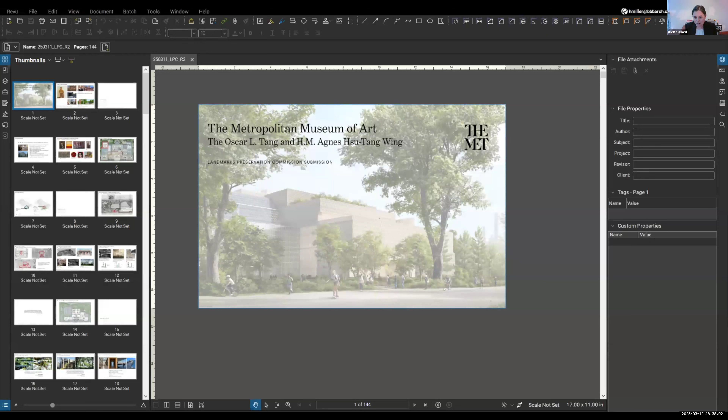Hi, everyone, can you hear me? Yes. Okay. Hi, my name is Brett Gallard. I'm the head of capital projects at the Metropolitan Museum of Art. Let's see if we can get our screen shared. Sorry, one minute, we just want to make sure we get the screen up. But maybe, in the interest of time, while they're working on that, because I don't need a picture to start talking, I'll just start and then we'll get the image up on the screen.

It's nice to be with you all again. I think the last time we saw you was for our Northside Chiller Plant project and 83rd Street doors. We're really excited to be here tonight with our colleagues from the Parks Department and the Central Park Conservancy, as well as members of our design team. This is an incredibly exciting project for us and one that's been a long time in the making.

It's the Tang Wing, our new wing for 20th and 21st century art, that'll be located at the southwest corner of our campus and will replace our existing wing at that location. In advance of our public hearing at Landmarks, which we are targeting for April 22nd, we'll be presenting to the 5 community boards surrounding the park. We were with CB10 last night, we're with you tonight, then CB7 tomorrow, then next week CB8, and the week after that CB5.

Our hope is to get 2 resolutions, one for the building and one for the landscape. We have 2 applications before Landmarks, one for the Tang Wing building and one for the landscape restoration and improvements around the building. That's why we're here tonight with our colleagues from Central Park Conservancy and the Parks Department. The landscape scope will also go through the Public Design Commission.

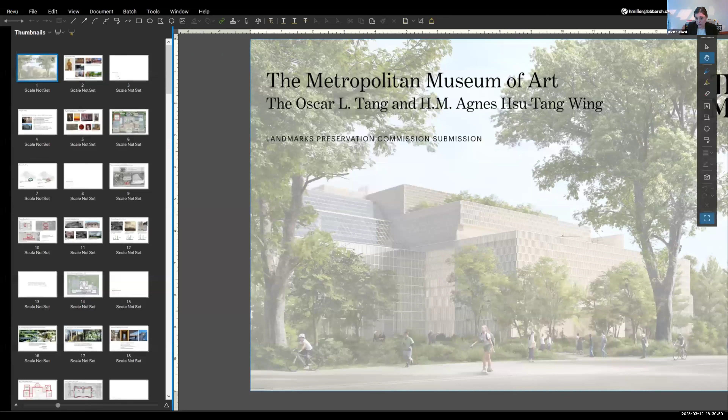In addition, we've embarked on a full EIS process for this project, so we will have a public scoping meeting for that on April 8th. The draft scope of work for the EIS is available on the Parks Department website, and I believe we shared a copy with you as well, but if we didn't, we'll make sure that we do.

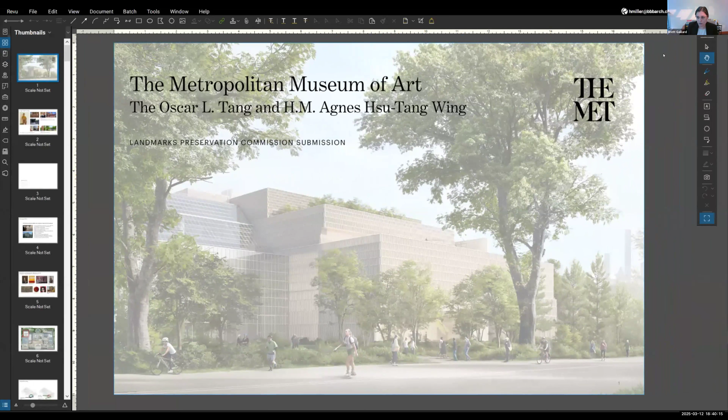Our overall schedule for the project, assuming all goes well, is that we aim to start construction in the summer of 2026, about a year and a half from now, with construction lasting approximately 3 years. Once the building construction is complete, the landscape work will begin with a target reopening date in 2030. It takes at least a year to reinstall the art, so while we're doing that, our colleagues in the park will be doing their work.

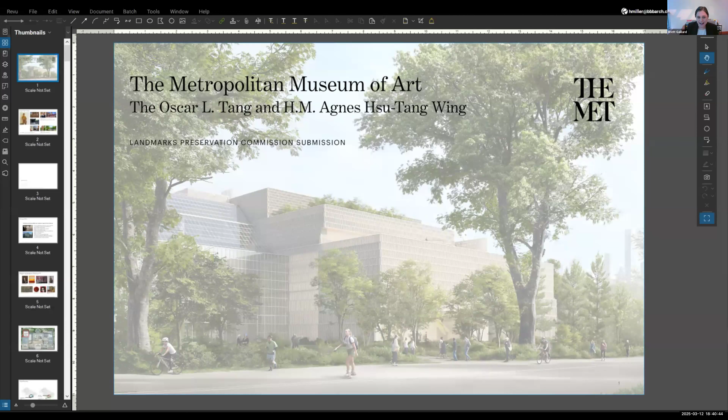Thank you so much. So we have engaged with an incredibly talented design team for this project, 3 of whom are with us tonight. As with our collection of art, we're charged with caring for and adding to the Met's collection of buildings with design partners that are aligned with our mission. For the Met, the selection of Frida Escobedo Studio as the design architect for the project is really just a continuation of a legacy of selecting innovative and contemporary architects of their time to add to the Met's collection of architecture.

So we're joined tonight by Andrea Shelley. She's the project director at Frida Escobedo Studio. In addition, we're also joined by Richard Southwick, partner at Beyer Blinder Belle Architects and Planners, who are the executive architects of the project, and they're known for their work on landmark buildings throughout New York and the world.

The Met, as you all know, is not only a landmark within itself, but it sits within the work of art that is Central Park, which is also a landmark. So we're joined tonight by the Central Park Conservancy, who are the landscape architects for the park area surrounding the wing. Nick Koster, Vice President for Design at Central Park Conservancy, will present the landscape. We can go to the next slide, please.

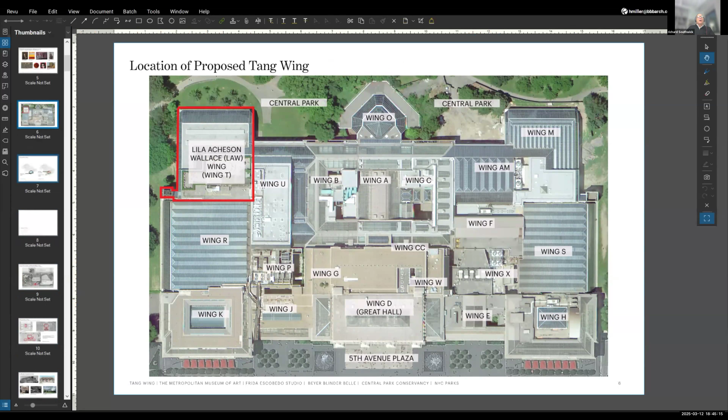The proposal will be built on top of the existing foundation where the parking garage is now. It will have precisely the same footprint of the building that it will replace.

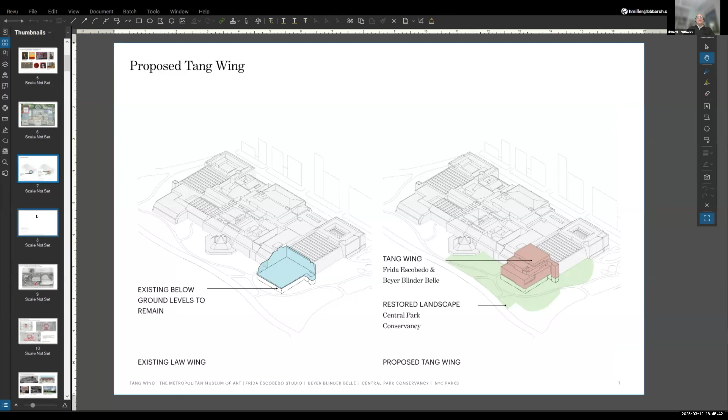We're going to have a two-part presentation. Andrea and I will talk about the Tang Wing and some of the context, and then Central Park Conservancy will talk about the restored landscape.

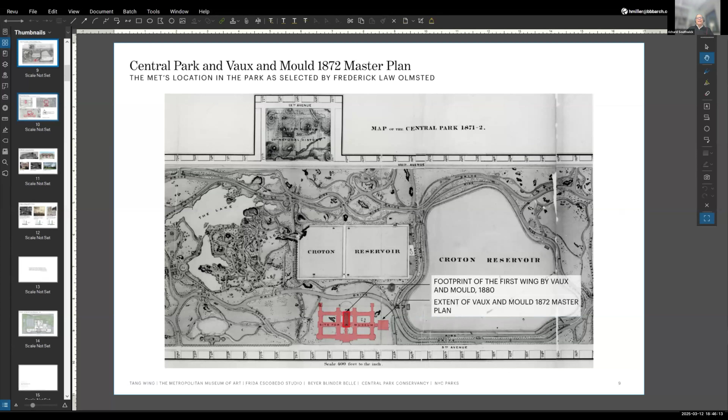The Met was located in the specific corner of Central Park selected by Frederick Law Olmsted. The first building plan was a master plan by Vaux and Mould from 1872. The first building was the current A Wing, which houses European art, and that was built in 1880. That's all that was built of this master plan.

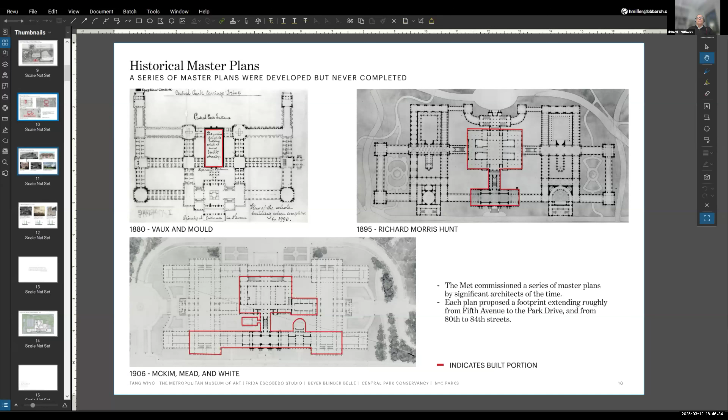Over the years, the Met hired some of the most prominent architects in New York to do revised master plans, all very similar - Richard Morris Hunt in 1895, McKim, Mead and White in 1906. Again, you can see in red what was built, which is just a small extent of the overall plan.

As the Met built buildings to build out the master plan, they hired the most prominent architects at the time, and that resulted in a whole diversity of architectural styles, as you can see, from Victorian to Greek Revival to International Style.

The Met is a living institution. It's always changing because the program needs are always changing. A McKim, Mead and White designed library and auditorium were both removed for the Watson Library we know now and the Grace Rainey Rogers Auditorium, both giving much more capacity for those needs.

Probably the most prominent change was the front steps that were designed by Richard Morris Hunt when approximately 1 million visitors walked up those steps. Kevin Roche, in his first project at the Met, did a much larger set of steps when the visitation was close to 5 million people at the time.

Landmarks recognized all this, and this quote from the 1967 designation report calls it one of the most notable monumental structures remaining in the city, designed by eminent architects reflecting diverse architectural styles. They recognized that as an asset of the Metropolitan Museum of Art.

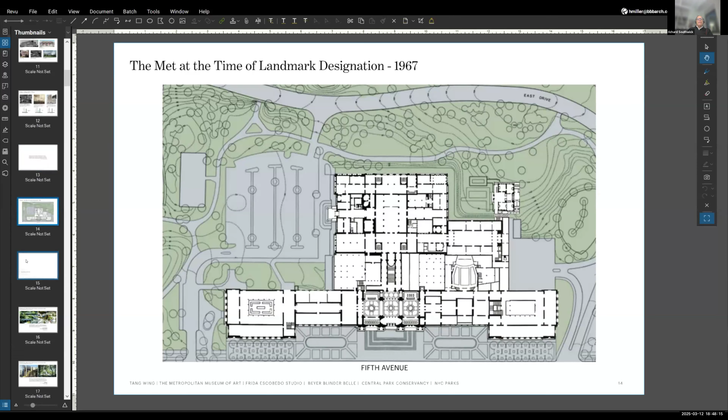This is the outline of the museum at the time of designation, flanked by two large parking lots to the south and north. The main entrance, as we know, is on Fifth Avenue, and then there's a secondary entrance in the park on the southwest corner.

Come the 1960s, the Met was celebrating its centennial, and to look towards the future, they wanted to do a new master plan, and they hired Kevin Roche to put that together. Kevin Roche is very well known for buildings that integrated the landscape and buildings, and this is a view of the Oakland Museum that was being completed at the time. Ada Louise Huxtable wrote in the New York Times that it's a potential breakthrough in museum design.

A little bit closer to home, the Ford Foundation was being completed at about the same time. Thomas Hoving, the director of the Met at the time, was very aware of these buildings and wanted to bring Kevin Roche on board. Roche worked very closely with Dan Kiley, the noted landscape architect.

There are a couple key concepts in Roche's plan. One, he wanted to complete his master plan, similar to the earlier ones, by having an alternating series of limestone and glass volumes. The visitor circulation was clarified by having clear paths through. He utilized daylight as a wayfinding tool to provide destinations within the museum, and wanted to enhance the relationship to Central Park, particularly in the glass volumes where you had good views out to the park.

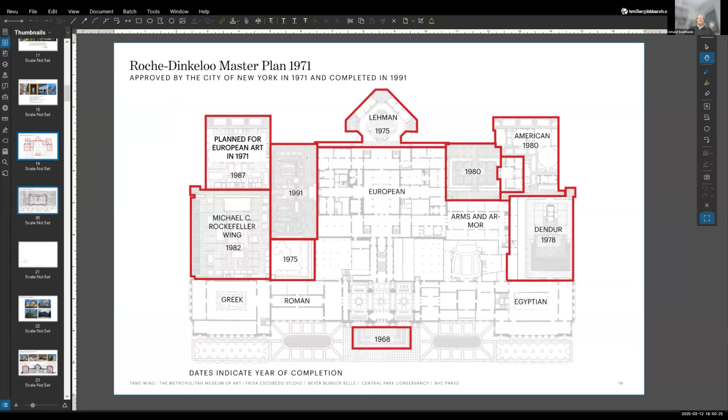We're going to talk a bit about the LAW wing and how that works currently for the Met's modern contemporary collection. This is what it looks like from the exterior: fairly tall, blank limestone walls.

It's interesting to compare the American wing and LAW. From the exterior, they're very similar, forming the northwest and southwest corners of the Met. But on the interior they're very, very different. The American wing, built in anticipation of the American bicentennial, was a series of period rooms, very well-designed and programmed spaces to meet that collection. LAW, on the other hand, was really originally programmed for European art. It's not really designed, and was not as good a fit for the modern contemporary collection.

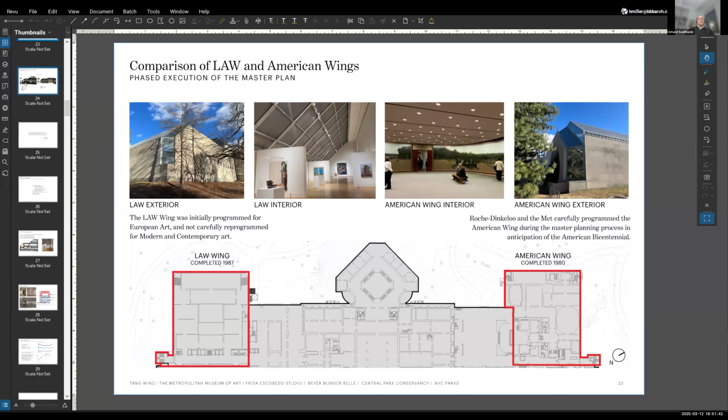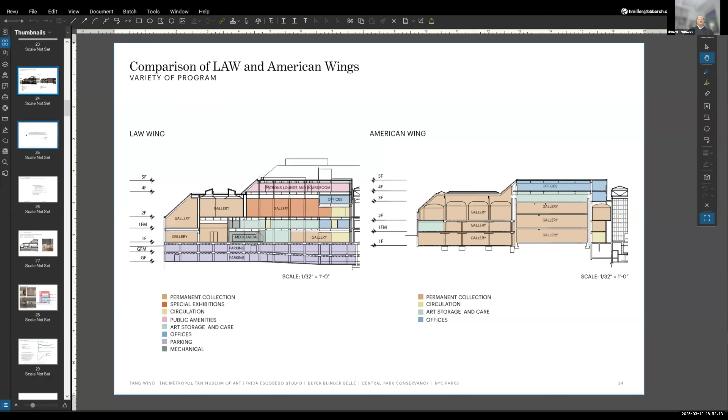Comparing the sections through the American wing and LAW, the tan or brown color is the permanent collection. The American wing had a very high percentage of space devoted to galleries. LAW, on the other hand, was a mashup of many different functions - a smaller amount of gallery space, a much lower percentage, with a lot of back-of-house, public amenities, and offices all put into the same volume.

Kevin Roche, after the fact, realized that this was probably the least successful of the parts of the Met that he designed. This is a quote from an oral history project: it never got built properly. I was never very happy with what happened. It wasn't a clear program - it kind of just got put together in pieces.

There are a number of defects that just don't work well - I'm going to focus on just a few. There's a series of skylights, visible in the right-hand photograph facing west, that would allow light to penetrate deep into the galleries, but that can't happen because it's detrimental to the artwork. So the shades of the skylights are always deployed. There's a lot of condensation damaging finishes, and the low wall at the base of the skylights limits what can be displayed in those very large spaces.

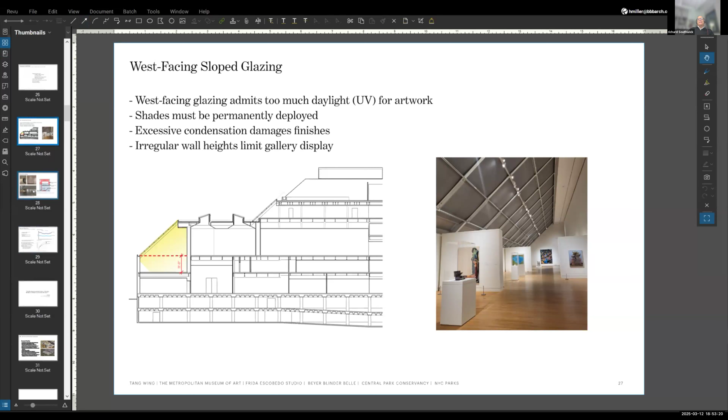Another main objective is to make the entire museum accessible, and that's one of the main goals in this project. A large mezzanine gallery has no accessibility, and a visitor who's mobility impaired needs to find a staff member - it's almost a two-block walk from the galleries back to the closest elevator and then back to the gallery again. So it's one of the things that just doesn't work; it needs to be remedied.

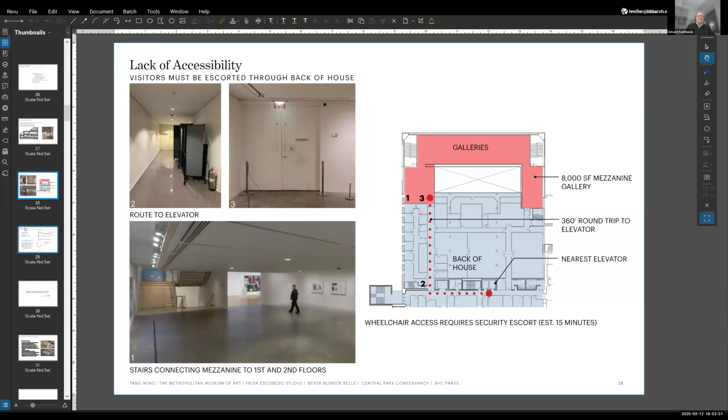As Brett talked about, both sustainability goals and the inadequate performance of LAW are factors. A new wing could improve energy consumption by 45% and over time have a lower carbon footprint than it does currently.

Finally, Roche really knew that museums change. This is a quote about how it needs to continue to grow, needs flexibility, and has to change going into the future. He recognized that these are living museums, and their change is inevitable.

So I want to set up Andrea, who's going to talk about the proposal, but these are some of the facts of that design and some of the goals as well.

The new Tang wing will occupy the same footprint as the existing wing, being no taller than the adjacent Kravis wing. It maintains the scale of the overall building forms throughout the museum, continues the use of limestone as a corner definition, and will enhance the visual connections to Central Park, which are now fairly non-existent. It will better accommodate the modern and contemporary collection, and achieve full accessibility and lower energy use.

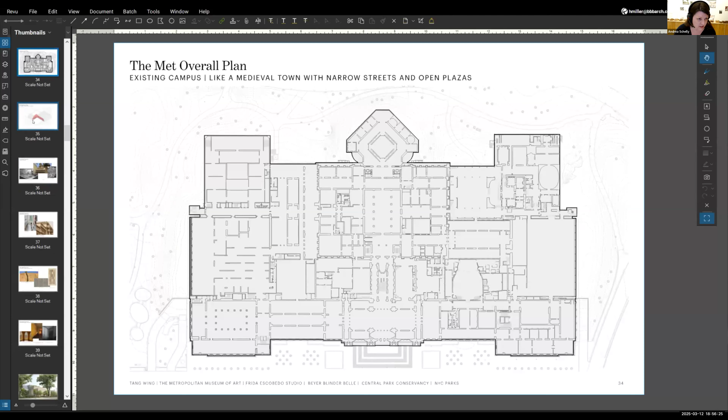The existing wing sits at a crucial crossroads curatorially between very important pieces of the Met's collection. The proposed wing will sit on the same footprint, the existing foundation walls of the existing LAW wing today. But through our interventions, we would like to open up new curatorial potentials within the new modern and contemporary collection.

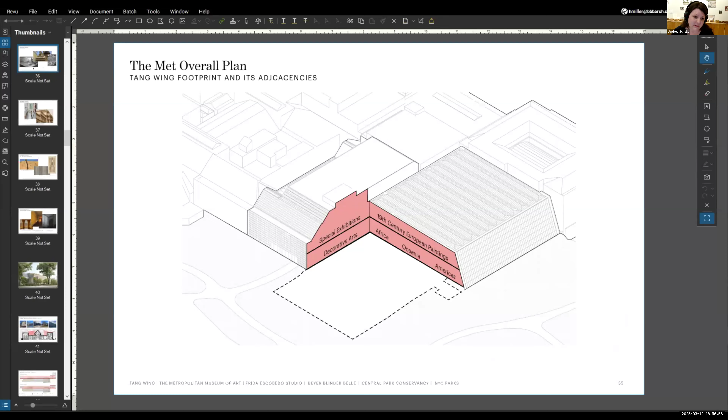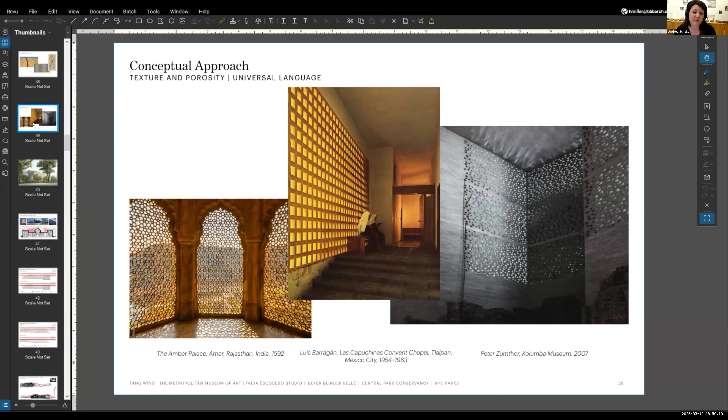We also draw upon architectural languages that are universal. Here we have three examples of something called a celosia, which is a screen, an architectural screen that allows light and air into a facade. It also creates a sense of texture and porosity in these buildings.

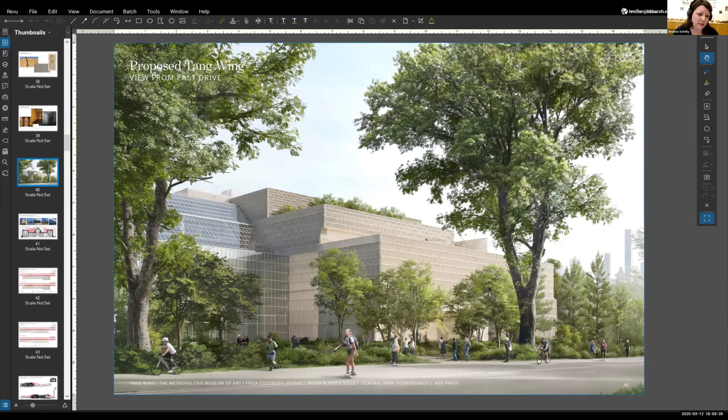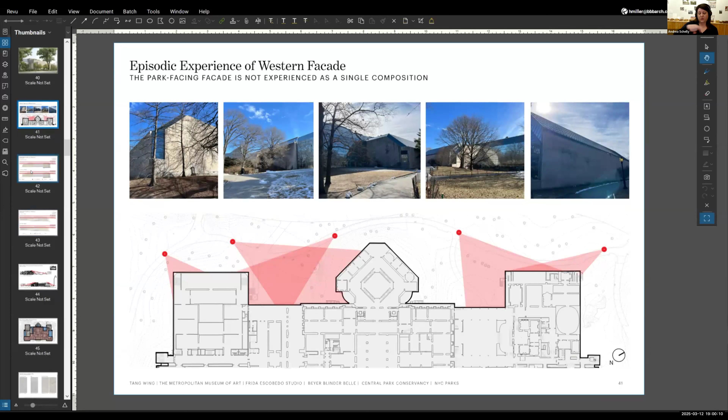In reality, the western facade of the Met is really only experienced episodically, meaning that as you move through the park, you never see the full western elevation as a single composition. Rather, you see it from key vantage points and corners. These are a few images of the path which circumambulates the immediate western facade of the Met.

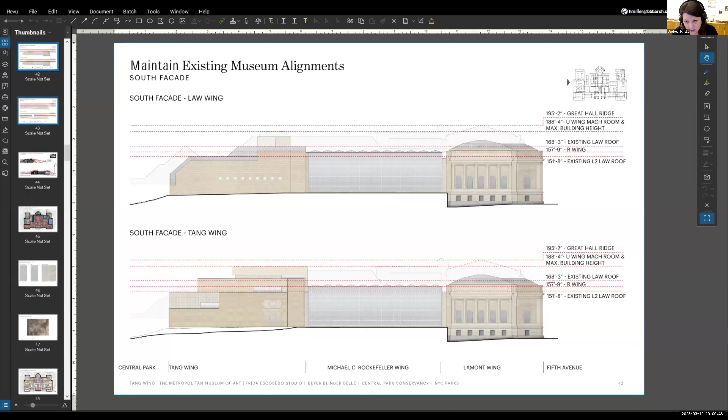These are two elevations of the southern facade of the Met. The top is the existing LAW wing, and on the bottom is the proposed Tang Wing. You can see we are working very hard to create these synergies between the existing campus, getting key alignments. We will not build any higher than the existing adjacent machine room, which we refer to as the U wing, and significantly lower than the Great Hall Ridge.

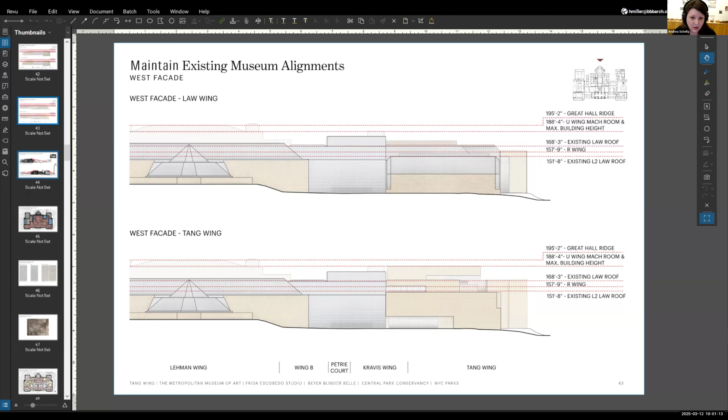And here we are on the western facade. Again, you can see those key alignments, which we are aiming to achieve with the existing campus. And here too, you can see that adjacent machine room, which is the top elevation of our proposed wing.

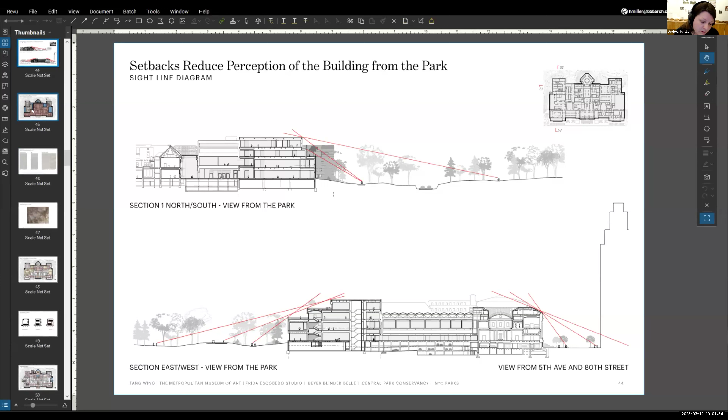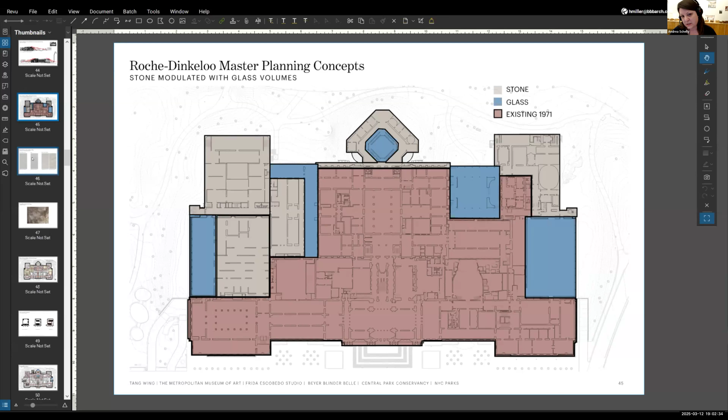Returning to the Roche-Dinkeloo master planning concepts, Kevin Roche used a sort of modulated volume with juxtaposing glass and stone to emphasize corners, and then using the glazed facades as the connective tissue between these stone volumes. So here you see a diagram with the stone corners as they are today, shown in taupe, and then the glass volumes shown in blue, and then of course the existing campus as it was at the time of the master plan in 1971 shown in red.

The proposal for the new Tang Wing will create a real connection with the existing campus through the use of materiality.

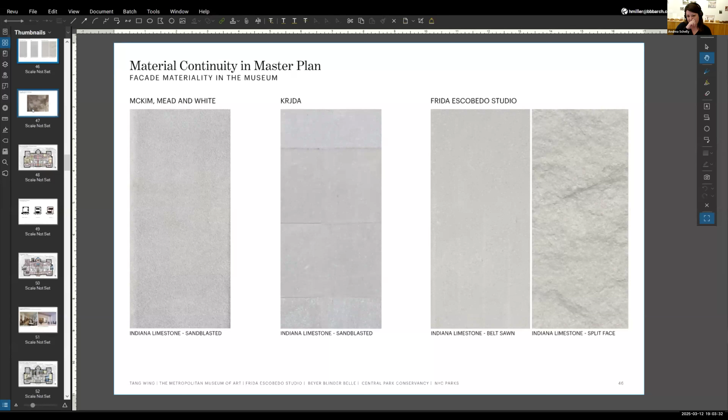Nearly all of the existing campus, save for the Roche interventions, are built with sandblasted Indiana limestone. We have an example of the McKim Mead and White facade on the left, the Kevin Roche facade, which is the existing LAW wing there in the center, also sandblasted limestone. We propose to use a belt sawn limestone, which has a very similar tone and texture as the existing limestone, juxtaposed with moments of split face limestone for additional texture at key moments, which we will describe momentarily.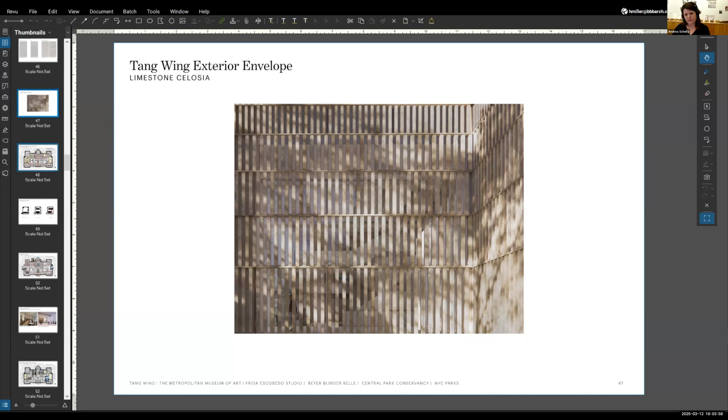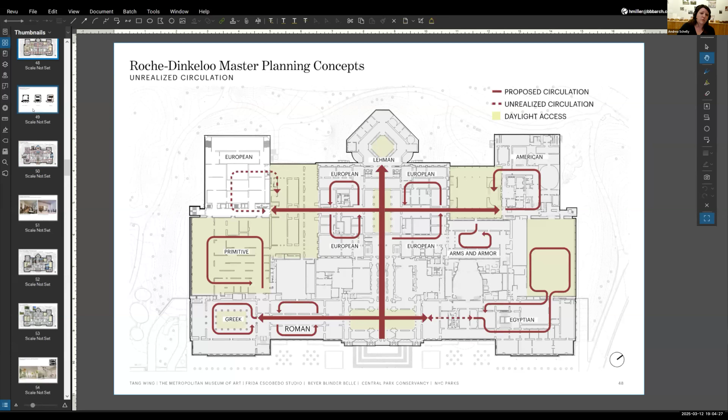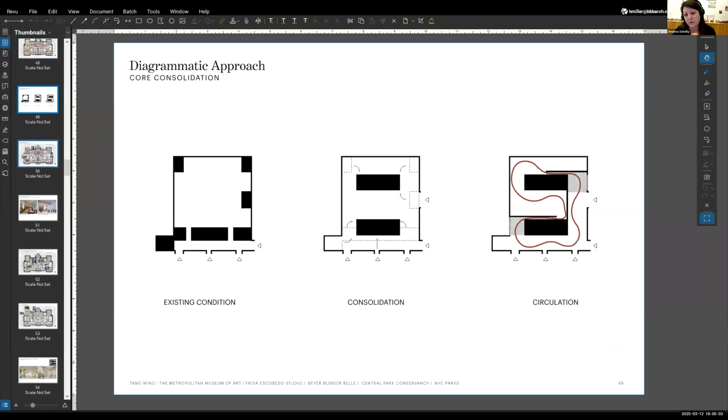Through our analysis of the existing circulation, you see in the dark poche blocks, those represent egress stairs, elevator cores, and some mechanical spaces, which really form a crust around the existing perimeter of the wing, preventing any kind of real interaction and engagement with the park beyond. So what we propose is to consolidate those cores into 2 cores, freeing up the perimeter zone to enable this complete circulation loop around the proposed wing. Here is a diagram showing that completed circulation loop in red, and you can see in the proposed plan on the upper left corner how that is achieved.

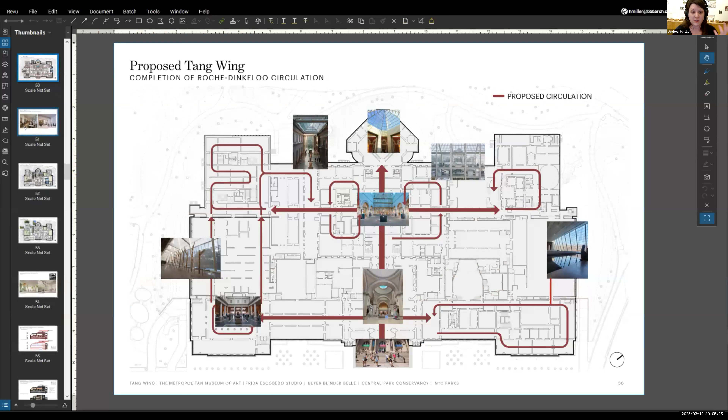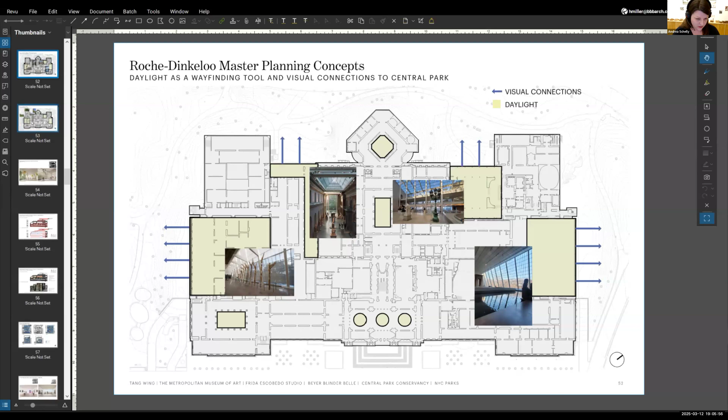Again, one of the master planning concepts, as I mentioned previously, these connections to daylight and these moments of elevated ceiling height for those very important visual connections to the park beyond. In the proposal for the new Tang wing, we will provide these similar opportunities for double height galleries with connections to the park beyond.

A couple of renderings of those, the Northwest Gallery on the left with views to Central Park. We're working with our colleagues at Central Park Conservancy to design the landscape immediately around the wing. And then a view of one of what we call the celosia galleries here, showing that sort of modulated view in and out to the Central Park.

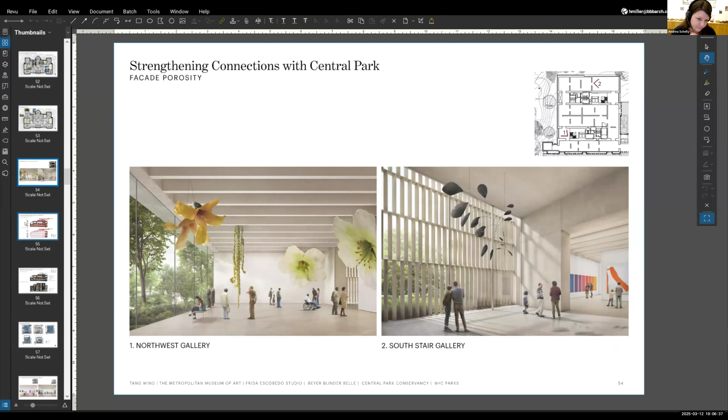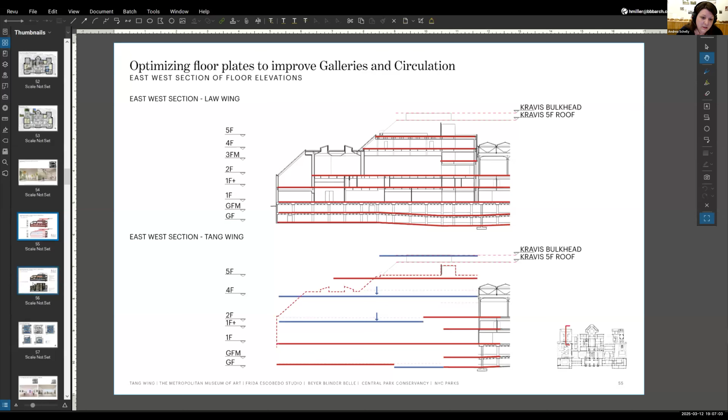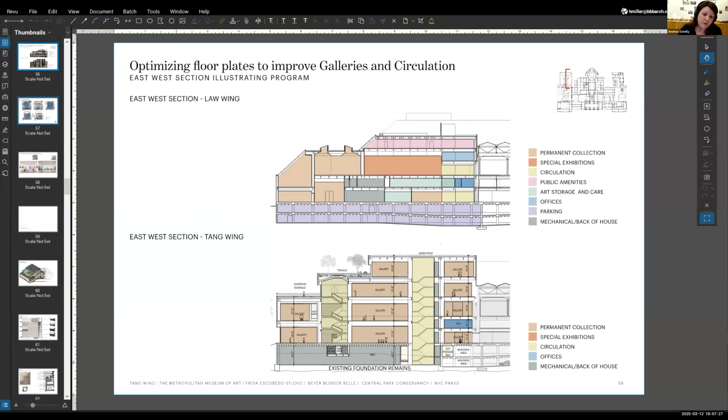And then two sections here, Richard touched on this briefly earlier. You see the existing programmatic distribution on the upper section and the proposed programmatic distribution on the lower section. The upper section illustrates this myriad collection of programs currently in the LAW wing, and by relocating those programs to other parts of the museum, we've been able to create larger concentrations of gallery space.

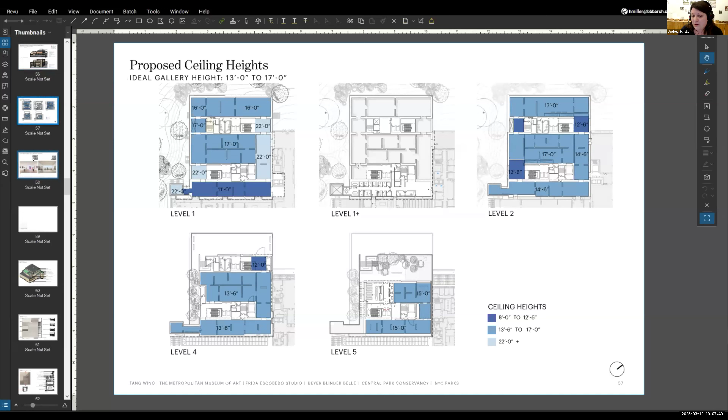So the next section of the presentation is a series of drawings and details which illustrate further thinking in depth about how we will build the new wing. I won't dwell on these too long, but we'll just quickly run through them.

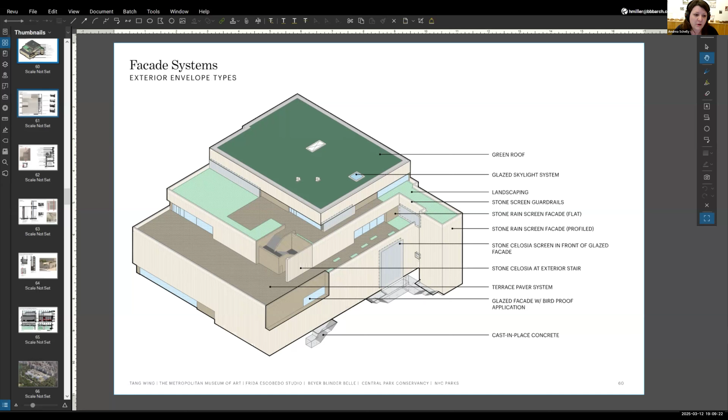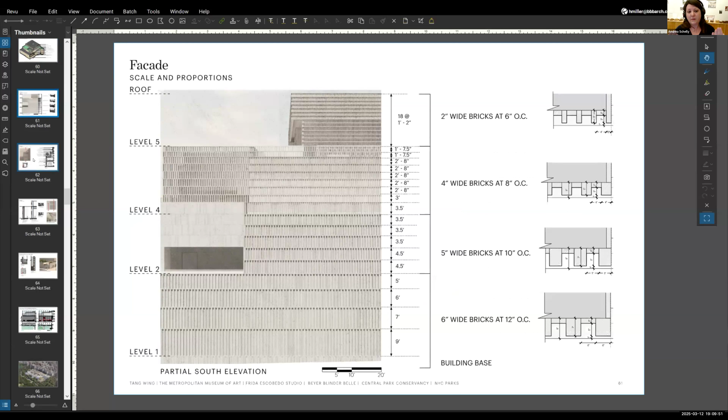This is a rendered elevation of one of the facades of the proposed Tang Wing. The important thing here is that we are changing the scale of the stone modules as you move vertically up the facade to create different kinds of engagement at different heights. At the park level it's a more urban scale, experienced more from a distance, and on the upper levels a much smaller scale module experienced one-to-one as people move around the terraces.

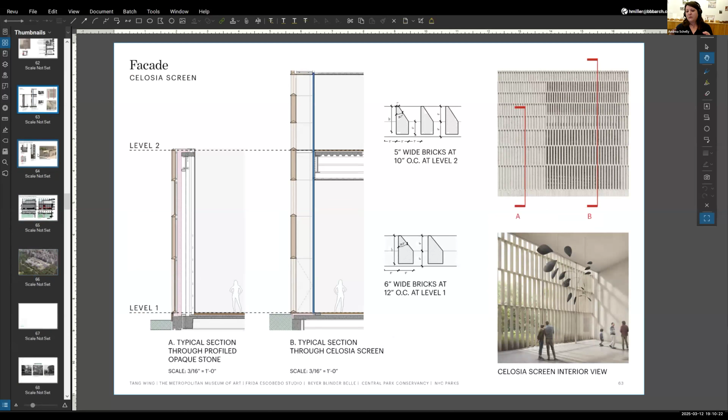Here we have a series of rendered elevations and sections showing construction details for these various systems. We could just move through these quickly. This is a plan detail of some of those celosia moments - the individual modules are actually angled to allow the maximum amount of view out while controlling and limiting the amount of light that comes inside to protect the art.

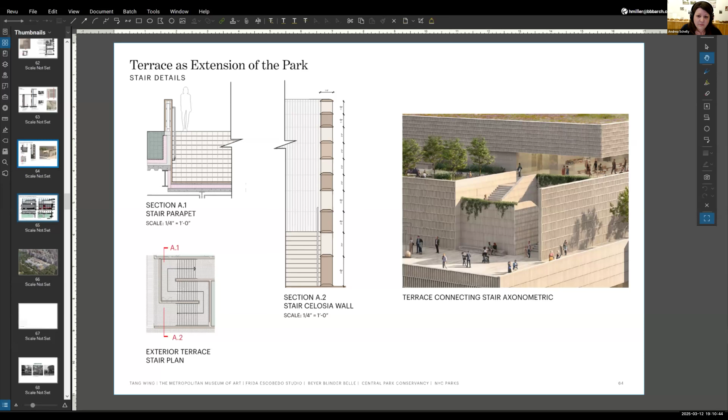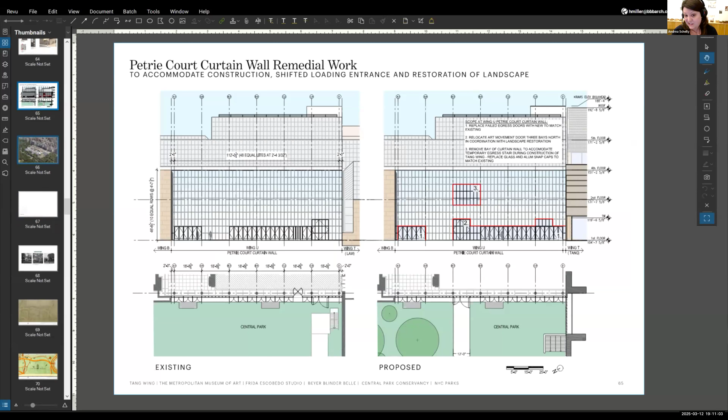There will be a minimal amount of remedial work done to the existing Petrie Court facade, in part due to a shift of the art movement path from outside in the park to the interior, and we will replace in kind the existing system, matching those existing profiles very closely.

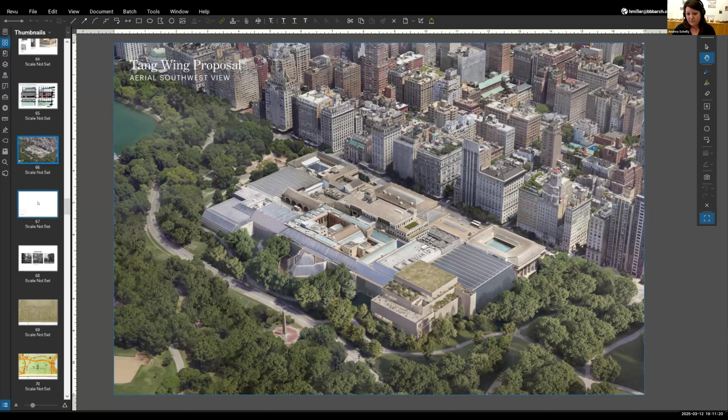And here we have an aerial, bird's-eye view of the southwest corner and the proposed Tang Wing. And here I'll pass it to my friend Nick Koster from Central Park Conservancy. Thank you so much for your time.

Great. Thanks, Andrea. Hi, everybody.

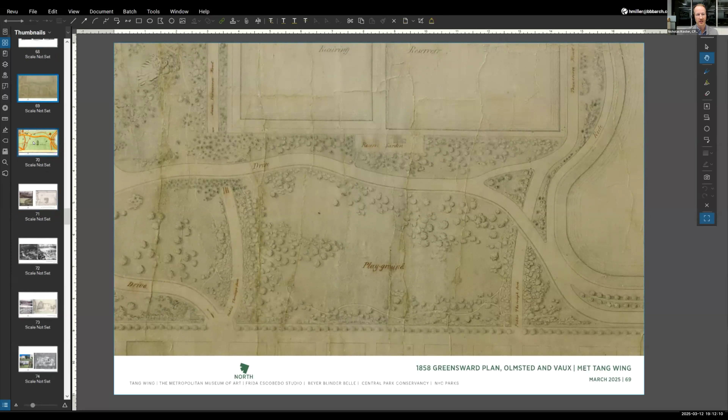Actually, when originally designed, the park did not have provisions for large public structures in the landscape. As Richard mentioned earlier, in 1872, Olmsted and Vaux provided guidelines for the addition of the Met Museum within the park in this location for specific reasons. It was situated between the former reservoir wall, located between two of the sunken transverse roads that bisect the park and the Fifth Avenue street edge.

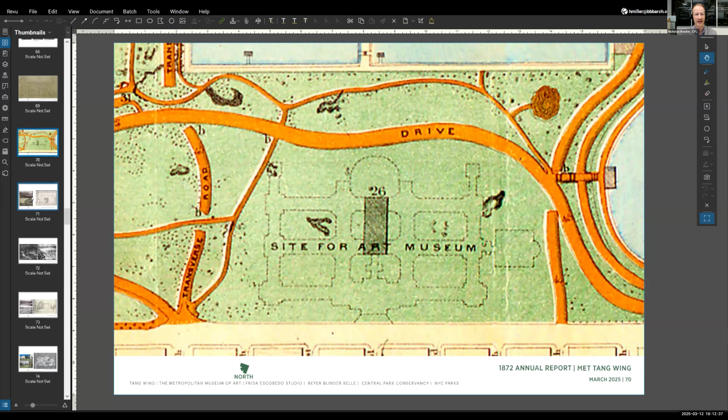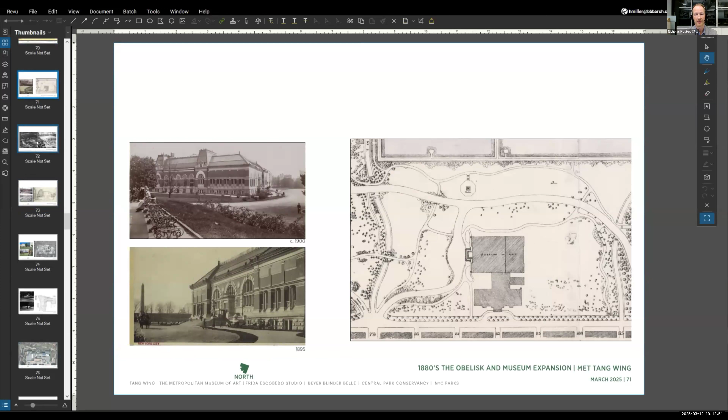As you've seen through the slides in the architectural presentation, the building was added onto many times since its establishment, and the park landscape around the museum also continued to evolve with the additions and modifications. For example, like the obelisk and changes to the park circulation.

However, in the 1930s, the relationship of the museum and the surrounding park landscape was significantly altered with the removal of the receiving reservoir. In its place, the Great Lawn was created, which removed the barrier that separated the park from the landscape around the Met, ultimately changing the relationship of the park to the museum building.

Not all of the changes after the creation of the Great Lawn were for the better of the landscape. In the 50s, a parking lot was added to replace the former carriage drop-off.

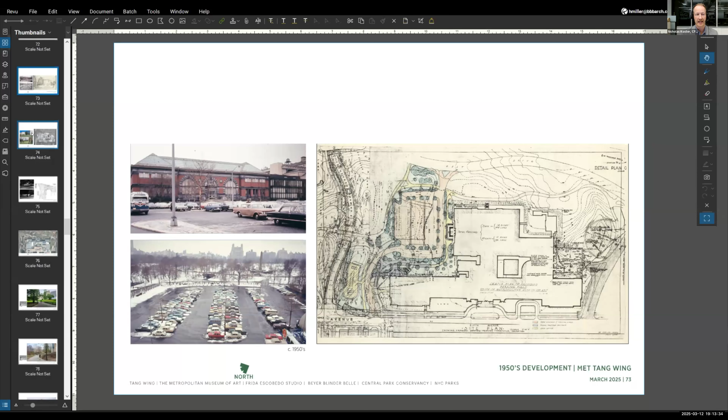The Roche Dinkeloo Master Plan for the museum and the expansion that happened, which we've heard quite a bit about in the presentation, really created the extent of the Met footprint in the park that we're familiar with today.

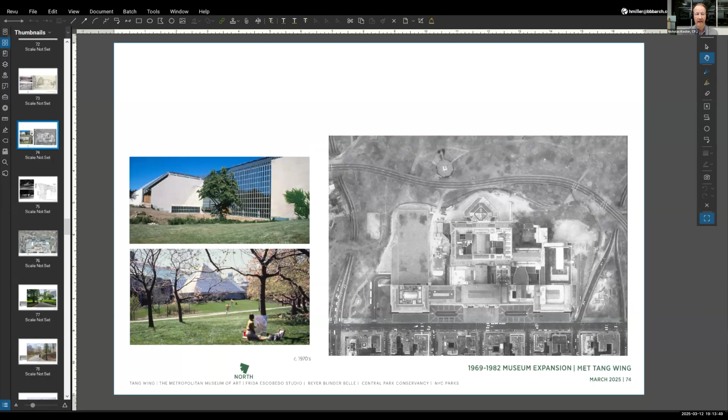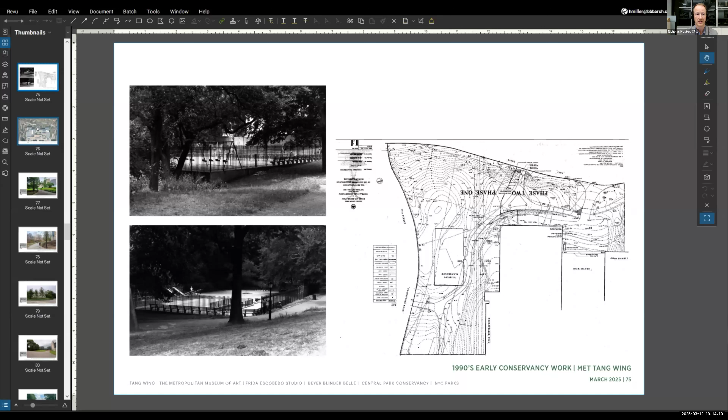In the 1980s, the New York City Parks Department prepared a landscape master plan for the entire landscape around the Met to address planting and park circulation. Some of that master plan was implemented in the 1990s by the Central Park Conservancy. One of those big moves was moving the playground, which you're seeing in this image, closer to the park perimeter.

One thing that we've thought a lot about with the landscape design is the views from the adjacent landscapes of the park, and those will also be impacted by this work. It's important that we are thinking about the landscape in all seasons.

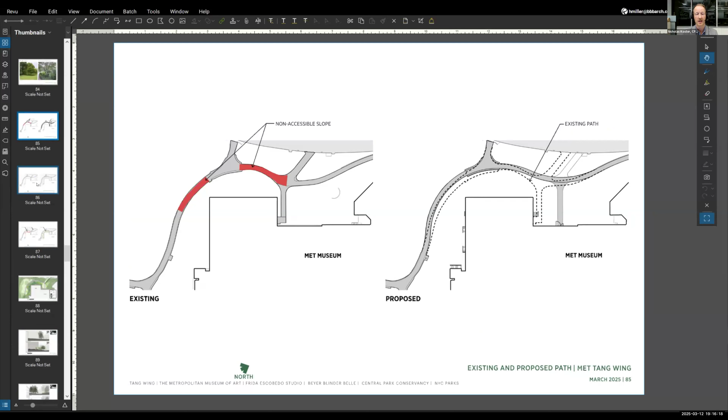A short series of diagrams highlights the landscape design. One of the big moves is relocating the path a bit to the south, which relieves that pinch point shown in the photo between the park and the building. By doing this, we're also able to regrade it and create ADA access along that path, which will extend all the way from Fifth Avenue up to the Great Lawn.

In addition to relocating the path, it will allow us to regrade this landscape and create a better relationship between how the museum wing meets the park, and allow for relocating the loading access drive away from the edge of the building at the Petrie Court.

In regard to the planting, we have 15 design-related tree removals that are part of the project, as well as 2 transplants noted with the T. We're proposing to plant between 40 and 50 new trees as part of the design.

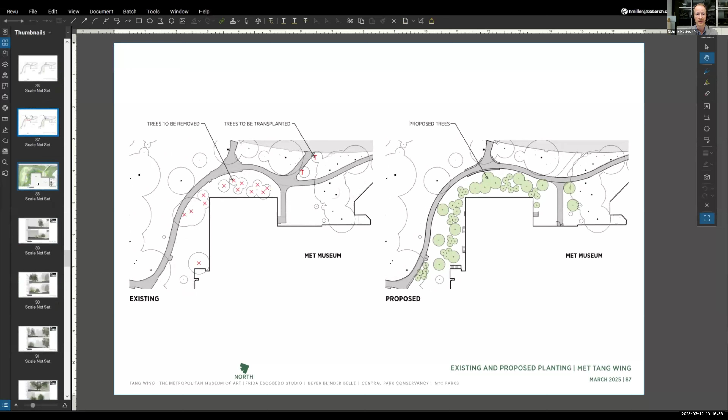In addition to the tree planting, we'll be planting a diverse understory, very characteristic of those four photos that we looked at earlier. Those will be planted around the building, adding a layer of visual interest and creating habitat, something that didn't previously exist within this landscape. Finally, here is a series of sections working around the building from north to south.

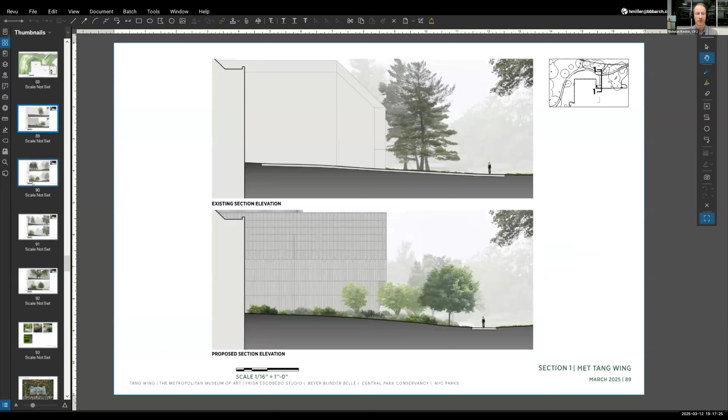We're showing the planting design in all of these at about 10 to 15 years maturity in all the sections. So at this one, this is taken through the window at the northern corner. It's really highlighting the changes to the grading and the planting.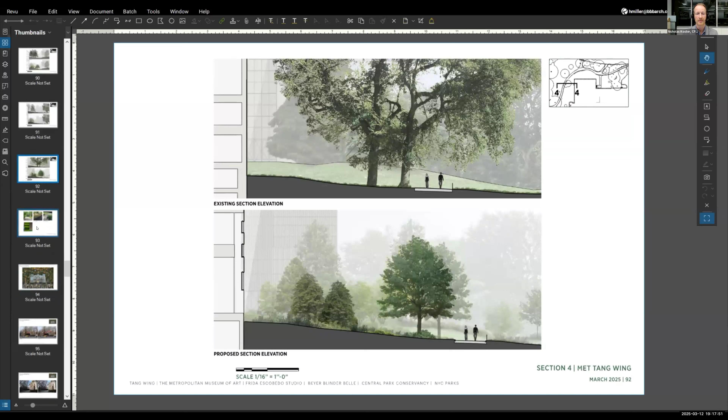Next, this one's a bit further down, cut through at Greywacke Arch. And next, on the southern facade, this is closer to the corner, showing the relocated path, which moves away from the building to create the ADA accessible path and the planting and grading updates.

So in addition to the typical planting palette that we've shown today, we'll be using fairly standard park materials for the palette: asphalt paths, settee benches, pipe rail fences. One new material we'll be introducing is a reinforced lawn surface, which will go into the location of the loading access drive that we showed you the photo of.

So I'm now going to turn it back to the Met team, and Andrea is going to walk through building views taken from the park.

Thank you. Yes, here you see an aerial photo of the Met, and you see little dots with numbers, and those indicate the views that we will walk through. So they're from the path immediately around the existing campus, and then East Drive and further out in the park, and Fifth Avenue, of course.

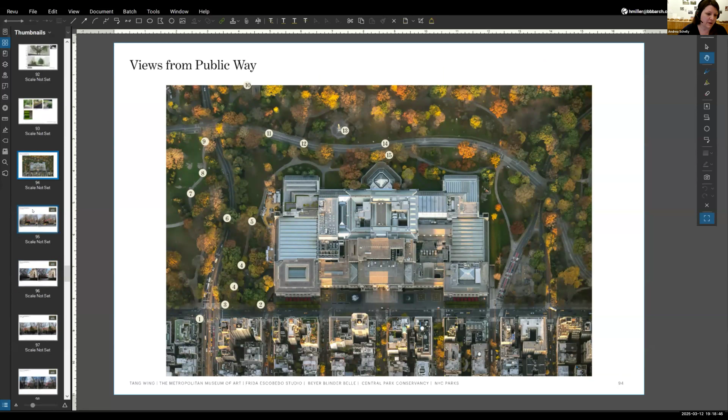Next, so here we're starting on Fifth Avenue, and in each of these series of images, you'll see the existing LAW wing photo on the left, and then on the right, you'll see the same photo with the proposed wing photoshopped in, rendered in, and the red dashed line indicates the perimeter or profile of either the existing or proposed, and they will not align between images because one is existing and one is proposed.

Next. Here is a view from the existing parking entrance along Fifth Avenue. And here we are again, still on Fifth Avenue on the sidewalk, moving into the path. Here we are walking on the path toward the southwest corner of the museum.

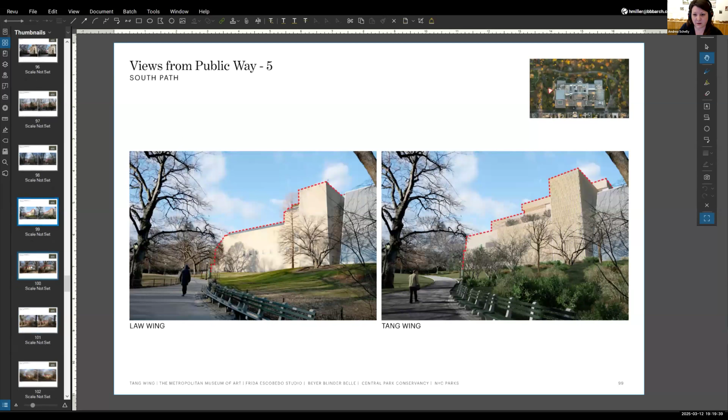And here we are, this is the south facade, existing on the left, proposed on the right. And here we are a little bit further back on the path, the southern facade again, existing on the left, proposed on the right. And all of these views are winter views, except for the last couple we'll show you, which are in the summertime.

The purpose of that is to show the worst case scenario, because many of the plants are deciduous, obviously.

And here we are on Cedar Hill, a little bit farther away, existing on the left, proposed on the right. And again, still on Cedar Hill, but on the path, that southwest corner, looking east. And here we are, the southwest corner again, a little bit further away.

Next, and then here we are on East Drive, a little bit closer, and you really begin to see that stepped massing moving away from you in space.

Next, and then the western facade, you can see that northwest corner, the glazed lower portion there was the same interior rendering view that we showed previously.

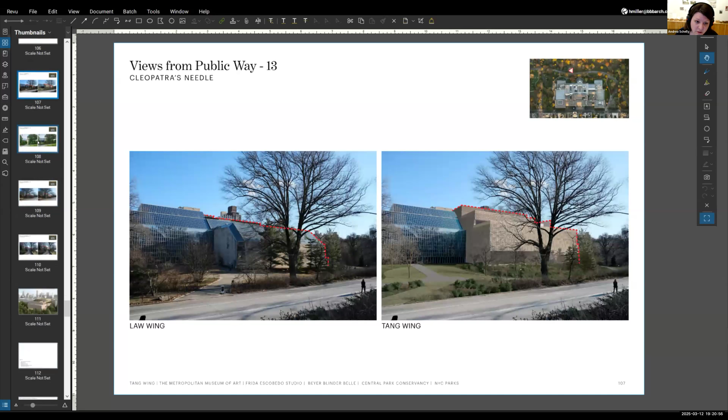Next, and then the northwest corner from Cleopatra's Needle, looking toward the south.

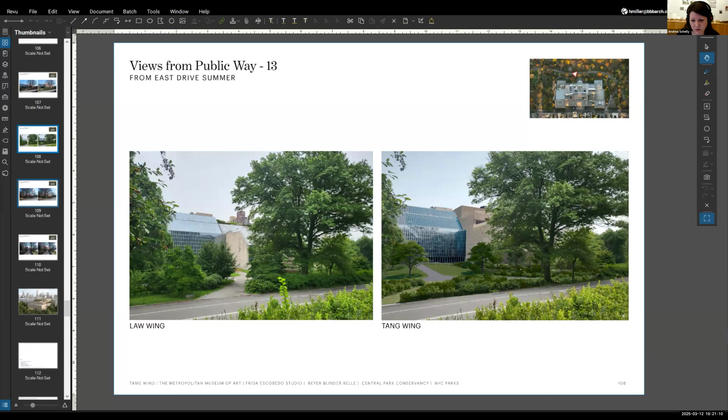And then here we are, a summer view. And from this vantage point, much of the building is obscured by the plant growth.

Next, and here we are in East Drive, again in the wintertime. This is the northwest corner.

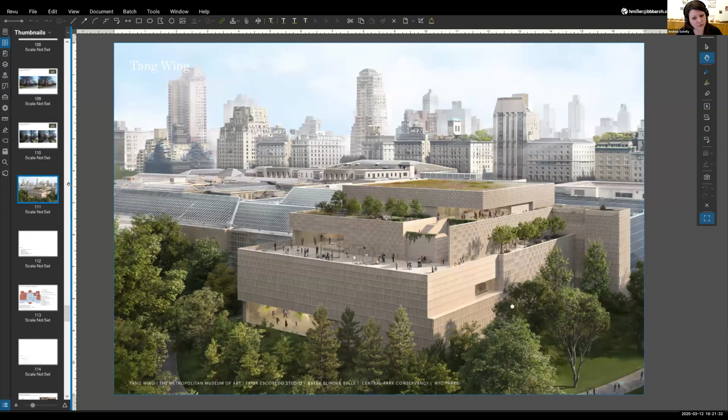And then here we are on the path approaching that northwest corner, and you can really see the profiles clearly here. And then this is a sort of drone view of the proposed wing, and you can see the 4th and 5th floor terraces shown very clearly here.

We're working with Nelson Byrd Woltz for the design of the landscape on the 4th and 5th floor terraces. So that is the conclusion of our presentation. Thank you so much for your time.